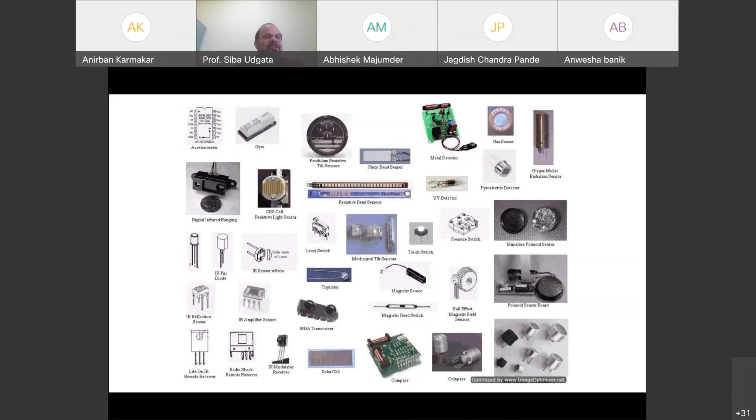A sensor might require some nanovolts to operate, and a sensor might require some kilovolts to operate. A sensor might require an electronic circuit to operate, or a sensor may require some kind of biological signal - a chemical sensor, meaning where you require chemical components to measure the sensitivity of the sensor. So this slide says there are different types of sensors, different sizes, different principles of sensing, different cost factors, and different reliability associated with sensing.

Now let me talk about what is a smart sensor, what is an intelligent sensor, and what is a normal sensor. Let us look at this diagram. I picked it from somewhere on Facebook, and I take this quote and use it to define what is a smart sensor network and what is an intelligent sensor network.

The difference between a smart man and a wise man is that the smart man knows what to say, and a wise man knows whether to say it or not. I put it in the same context here: what is the difference between a smart sensor and an intelligent sensor network?

A smart sensor knows what to measure, but an intelligent sensor knows whether the measurement needs to be forwarded to the server or to the cloud for some decision making or not. I repeat: sometimes I know what to say, but whether to say it or not, this is my wisdom.

Similarly, when I talk about smart and intelligent sensors, many people say that a smart sensor knows how to observe the data, how to collect the data, what data is to be collected, and all that. But there are some more algorithms which sit on top of these measuring devices to decide whether this data needs to be sent to the server or the cloud or not.

So in a smart city perspective or in any sensor network perspective, the sensors will collect the data, but there should be a decision taken at the edge. We call that decision at the edge, or intelligence at the edge, to decide whether the decision will be taken at the edge, that is, at the endpoint, or at the server level, or in a distributed environment, or at the cloud level.

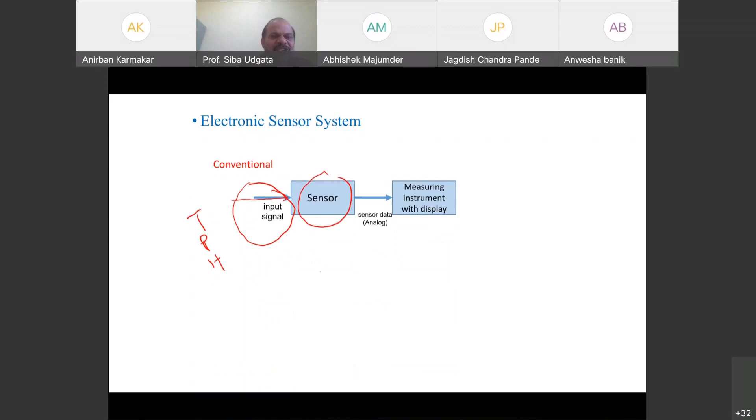So temperature is given, and your temperature sensor or pressure sensor or humidity sensor will measure it and display it. Let's say you have an infrared temperature sensor now, you see it in every mall, every place, etc. When you enter, they aim at your forehead or something and measure the temperature, right? That's a simple conventional sensor. They get the input signal, the sensor measures the data and displays it. That's it. There is nothing else - no decision making, no processing, no controller, no saving, nothing.

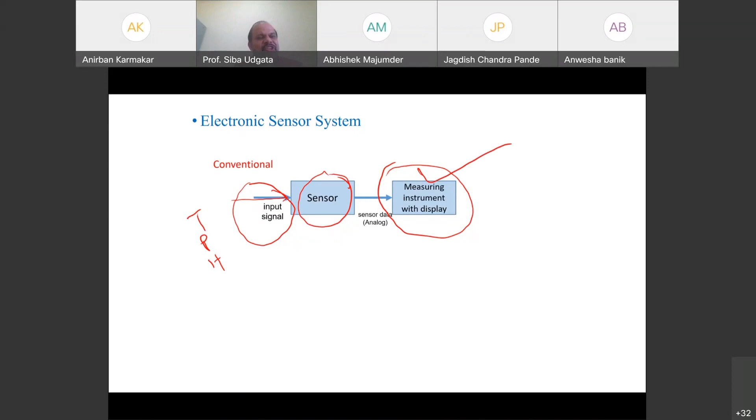What happens in a smart sensor, a little bit enhanced sensor: we get the input signal, same T, P, H, etc. Then the sensor will measure the voltage or current, because I want to classify it. So the sensor will give you a signal. The sensor will not give you a number, I repeat. The sensor will always give you a signal, and that signal can be a voltage, a current, or a light, etc. Now, based on the voltage output, current output, or light output, you have to convert that to a number or a digit. So the sensor gives me a voltage or current.

Then we have an ADC. What is ADC? ADC stands for analog to digital converter. So if I get a signal like this, it will be converted - this is the peak, and this will be converted to 25 degrees centigrade. So this conversion is done by the ADC, analog to digital. So voltage, current, etc. are analog signals.

ADC means analog to digital converter, that gets the digital data. What is the digital data? That's 25 degrees centigrade or 26 degrees centigrade, or pressure equal to this many pascals, etc. So that is the digital data. Then this data comes to a microcontroller or a microprocessor.

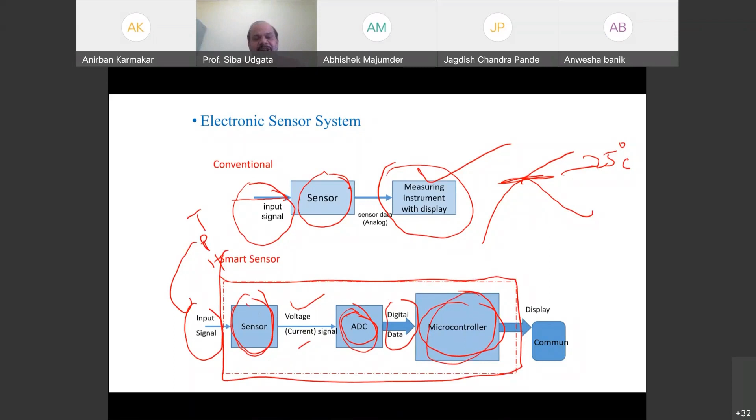So in the node itself, now look at this. This is my node. In the node, I have a sensor, I have an ADC, and I also have a processor, a microcontroller processor. So this microcontroller can do a little bit of processing. Then either it can display the data or it can even communicate to a server, depending on the requirement.

So what is a smart sensor and how is it different from the conventional sensor? In a conventional sensor, we only deal with the sensor. In the smart sensor, we have a processor, an ADC, and a communication module also. This communication module will either communicate using Wi-Fi or Bluetooth, etc., to communicate to a server or to a nearby device, or simply display it.

Now, what happens in an intelligent sensor? This is defined in IEEE 1451, the standard for an intelligent sensor. So what you do here, we have an input signal. We have sensors, and the sensor will give you voltage or current. Then we have an ADC, analog to digital converter, that gives you digital data.

Then we have a microprocessor. Go back to the previous slide - we have a microcontroller or microprocessor here. That microcontroller or microprocessor can be Arduino, can be Raspberry Pi, can be ESP, can be anything, right? And then this is important - this part is intelligent. In that microprocessor, we have some intelligent algorithms, AI-based algorithms or machine learning algorithms, which take the intelligent decision.

Now, the data comes, the voltage or signal comes, the ADC converts it to digital format. The digital data is fed to the microprocessor. The microprocessor, with the help of embedded intelligent algorithms, takes a decision and then displays it or communicates it to a server. So this is basically what an intelligent sensor is. The only difference between an intelligent sensor and a smart sensor is this intelligent algorithm.

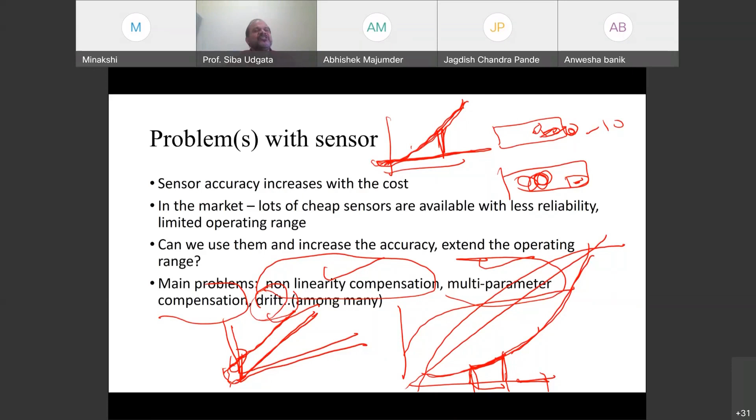So I have already told you what is nonlinearity compensation. Linear means simple curvature - this is linear. But nonlinear is this. So this is nonlinear, and this is linear. If it's a straight line equation, it's linear, but we have already discussed nonlinearity compensation.

Nonlinearity in a sensor is already there. In the characteristics curves, we see that there is a nonlinearity in the compensation, and sometimes the nonlinearity characteristics also vary with the range of values. For example, it can be like this, then it becomes like this, then like this, like this. So this is also an important thing.

The effect of nonlinearity is that you are trying to measure the values of the parameters using the sensor in a wrong way, and that measurement error will affect the decision making there. So what happens actually is these characteristics are time varying, because they vary with the range, and they are also influenced by other environmental parameters.

For example, my heartbeat - my heartbeat normally increases a bit if I'm running a fever. So if you run a fever, because of the fever your heartbeat increases, not because of a heart defect. So those effects will also be there, and that makes the system quite unpredictable. The value that comes actually becomes unpredictable because it depends on so many other factors also.

So this is the problem of nonlinearity, and any intelligent sensor in a large scale application has to address it theoretically so that you get a better result. Better input means better output, better decision making - you know that principle, right? GIGO: garbage in, garbage out. So if your input is garbage, if your input is erroneous, then you will get erroneous decision making.

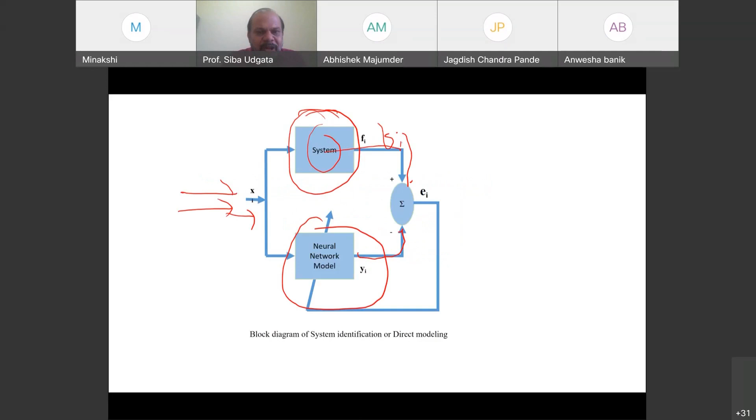So the hardware sensor system will give the output, that is my function, and this function I take it and give the inputs to the neural network also. The neural network will also give me output. The sensor fusion will give me an output, and there will be an error here, and that error I take and change the neural network.

Once the neural network is trained fully, I don't need this sensor. I repeat, this is my sensor output, meaning with error and all these things, and I know what is the actual output. So the sensor output is there, the neural network will be there, and this neural network will compensate the sensor. Once I get this value, I'll take the neural network compensation output.

So what I'm doing is, let's say this is my actual value, and this is my sensor observed value. There is a difference between these two values. Now this difference, that is the error, I want to minimize this difference, I want to mitigate this difference. So with this neural network and this system value, I try to find out what is the error and minimize it. When I minimize the error, when it becomes 0, that means whatever sensor output I get, X, the same sensor output I pass through the neural network and the system, and here I get the output and the error becomes 0. So that is direct modeling.

What is indirect modeling or inverse modeling? The direct modeling is basically what we are doing. We are finding out, given f, x1, x2, etc., I find out what is the function f to predict y. But what is inverse modeling? Can I predict x given y? So y equal to f of x is direct modeling. X equal to f of y is the inverse modeling, right?

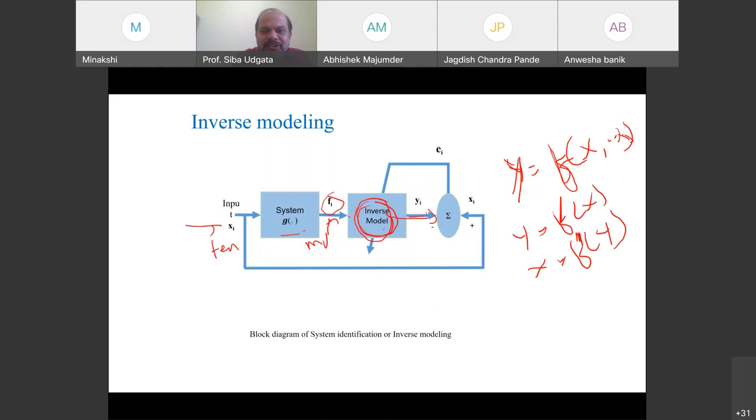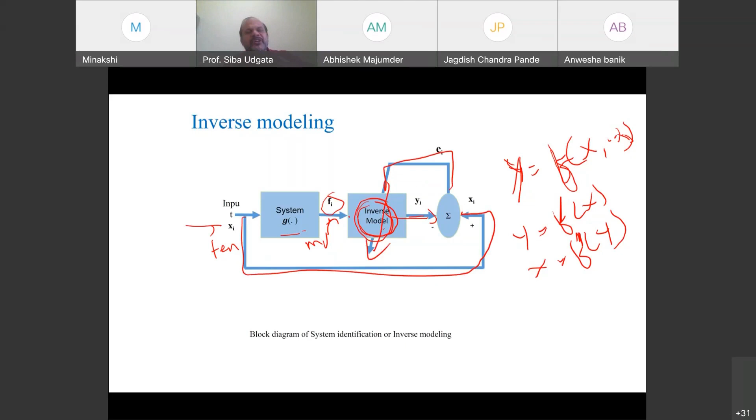Let's say this is my temperature, this is my voltage, my millivolt that I'm getting here. This millivolt, I will give it to the neural network, and I predict what is the temperature. Now I know that the temperature here, this value is the error. Now I take this error and correct the inverse model, so that given the millivolt, I can find out what is the temperature, and given the temperature, you can find out the millivolt. Given the millivolt, you can find out the temperature. So what is direct modeling? You reduce the error, and in the indirect modeling or inverse modeling, from the output you can get back the input also. So these two models are used to cross check the input in a proper way.

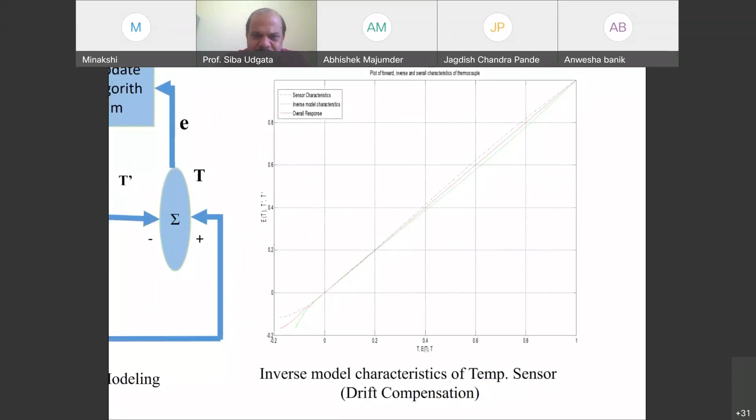Now this is another model. I think the things are a little small, let me try to look at this. I'll draw this actually, so look at my cursor here. This is the inverse model characteristics for temperature sensor drift compensation. So what is drift here? Look at this part, look at this diagram.

So this blue line, when this is 0, it should be 0 here. Now it is not 0, there is a drift here. Now look at this drift. If you look at it, the drift is also nonlinear. It is going like this, then it is changing like this, then becoming like this, etc. Now there is a green line here, so the green line here is this.

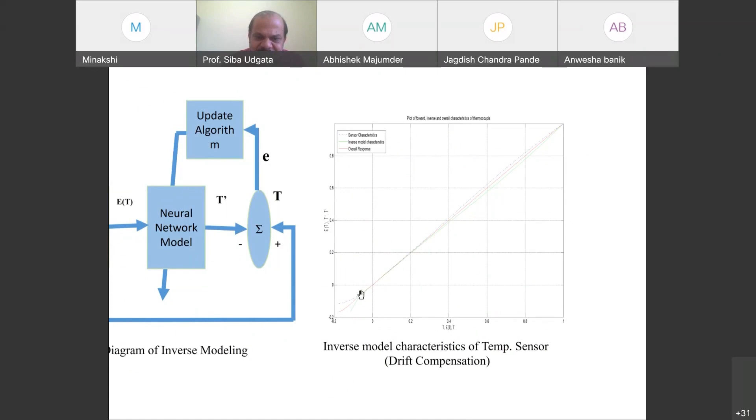Now what I do with the green line is basically like this. Let me plot it like this. So it is like this, my drift is here, it is going like this, and the green line is trying to do like this. So what happens is the drift becomes now this. Once you superimpose this green line, this is my green line, this is my blue line, and I superimpose this, so this becomes a linear drift correction. So then my problem is solved. This is another one where I say that, key. Now look at this, okay.

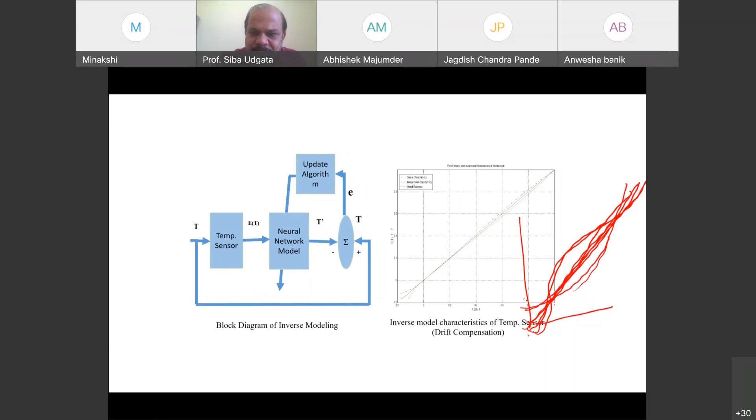Now look at this. The blue is the sensor characteristics - look at the nonlinearity here. This green is the inverse function that we have generated. When you superimpose this green with this blue, you get a linear line. That red is the linear line.

Once it is linearized, my problem is solved. But what the companies do, or the standard conventional sensors do, is look at this blue line and find that there is a linear characteristic between 0.3 to 0.6. So they say my sensor will work between 0.3 to 0.6, other things you manage, I don't want to do that. So by this model, we can extend the operating range of the sensors.

Now, in any smart city environment, monitoring of the water level in overhead tanks of societies, individual homes, etc. is very important, because there is a lot of water wastage due to overflow. Now what is the normal method people are trying to do, or what is available in the market?

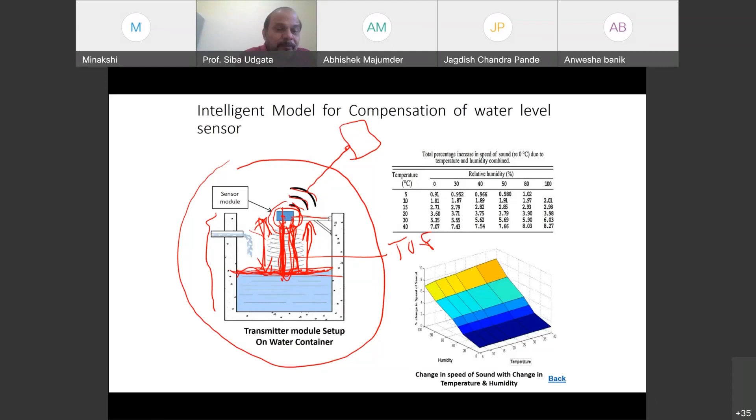But the problem is that the speed of ultrasonic sound heavily depends on the temperature and humidity of the medium. It also depends on gases like carbon dioxide and nitrogen, but it heavily depends on temperature and humidity. If the temperature changes, the speed of sound changes. If the humidity changes, the speed of sound changes.

Here's a small example: the speed of sound normally used in calculations is 340 meters per second. But when the temperature is very low, say 5 degrees centigrade with relative humidity 0, you have to multiply it by 0.91 - that means 9% less. 9% of 340 is about 30 meters per second, so it becomes 310 meters per second. So there is an 18% error overall.

There is an 18% error between temperature 0 degree centigrade to 100 degree centigrade and relative humidity 0 to 100 - a difference of 18%. That means the speed of sound changes by 18% maximum depending on temperature and humidity of the medium. Problem number one. That means the speed of sound, which you take as 340, now varies between 290 to almost 400.

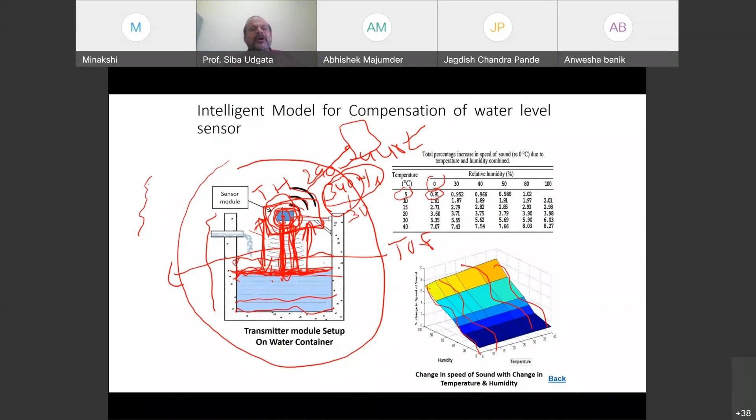Problem number two is that in this part you have the temperature and humidity, meaning you are measuring the temperature and humidity at the top of the water tank. But because it's a water tank, the humidity near the water is more, the temperature near the water is less. Whereas at the measuring point at the top of the overhead tank, the temperature is more and humidity is less. So when the sound wave travels, there is a gradient of temperature and a gradient of humidity which you cannot measure. So we require a kind of machine learning intelligent model to compensate this, not just temperature and humidity. Physics alone cannot do it because there is a gradient of temperature and humidity in the medium, and I need to compensate for that gradient without measuring it. So that's the problem, right?

So we tried to do it, and as I've already explained, you find the time of flight, you find the velocity multiplied by time of flight, divided by 2, that is the distance. This distance represents my water tank, so this much of water is available.

That is fine, but this velocity of sound is erroneous. This depends on temperature and humidity and other factors, but mostly on temperature and humidity. Because it depends on temperature and humidity, this V value changes. If the V value changes, the D value will change. If the D value changes, everything changes, right? So your entire decision making changes.

So this is a simple ultrasonic sensor. This goes, hits an object, comes back, and then we did all these things. That's a simple experiment.

So we did some experiments. This is a University of Hyderabad overhead tank. We put this water sensor, and this itself is not difficult - everybody does that. But what is important is that we put this intelligent compensation into it.

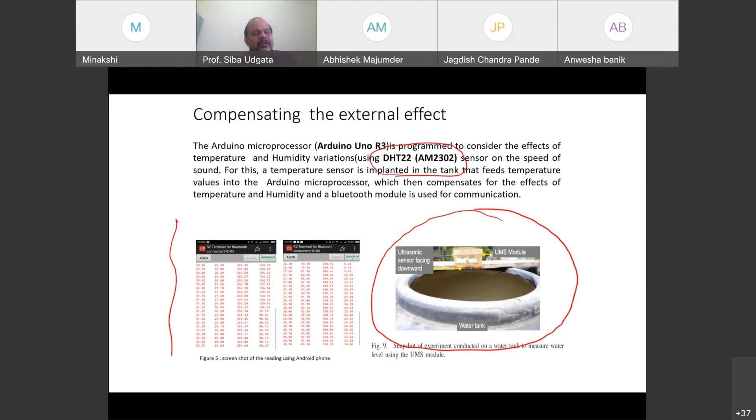We used a DHT22 sensor, which is basically a temperature and humidity measuring sensor. We collected a lot of data during winter, during summer, during high humidity days, during low humidity days, and all that - when the overhead tank is full, when the overhead tank is empty, when it is half full, all sorts of conditions. We did it for almost 6 months.

Then we found that there is a distance measurement uncertainty there, which I already explained is because the temperature and humidity are changing. And we found that the temperature and humidity are indeed changing. For example, in an overhead tank between 100 to 500 centimeter depth, we found that the temperature at the top versus at 500 centimeter depth - this is how it changes.

Humidity is changing based on position. At the top position, the temperature is 24, humidity is 71. In the middle of the tank, the temperature is 23.5 and humidity is 72, increasing. Nearer to the water level, the temperature is 23 and humidity is 73. So there is an increase in humidity when you go below the overhead tank, and a decrease in temperature as you go down.

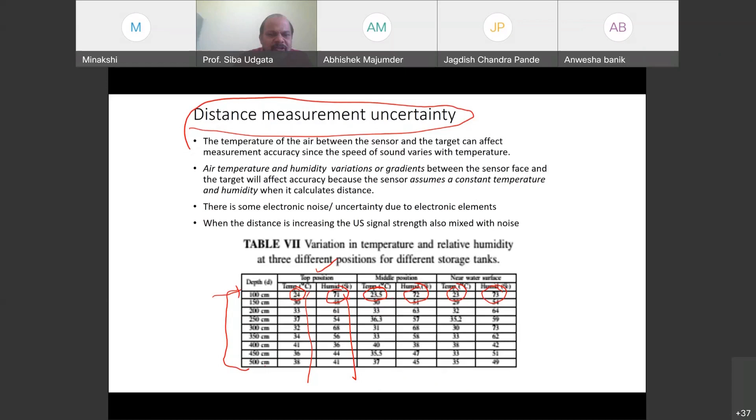This was for a 100 centimeter, that means 1 meter tank. We went up to a 5 meter tank actually, a huge tank, so we found that there is an uncertainty in the measurement.

Now don't worry about that result, look at this result instead. We found that the error was almost 18 to 20%, but between the 2 to 100 input range, that means if the water is only 2 centimeter or 98, 100 centimeter etc., the mean square error is only 0.03. So if the actual water level is 100 centimeter, at best I'm getting 100.03, which is almost negligible. Earlier we used to get 110, 120, 115, etc.

Between 101 to 200, when it increases there is slightly more error, but still only 0.08. And maximum, up to 5 meters, I get an error of 0.23. That means if the tank is measuring up to 450 centimeter of water, I am getting maybe 450.23 water there.

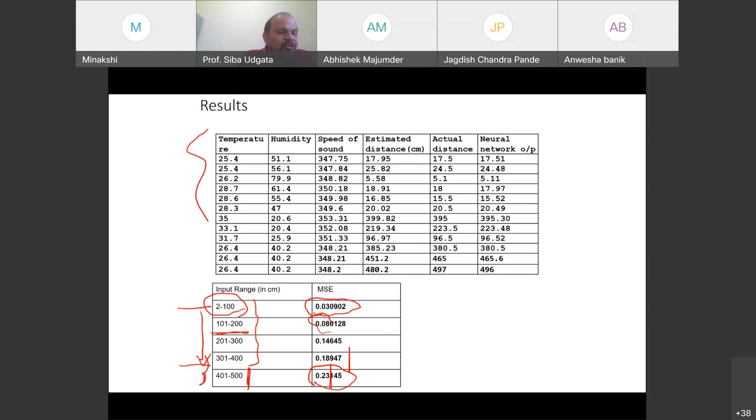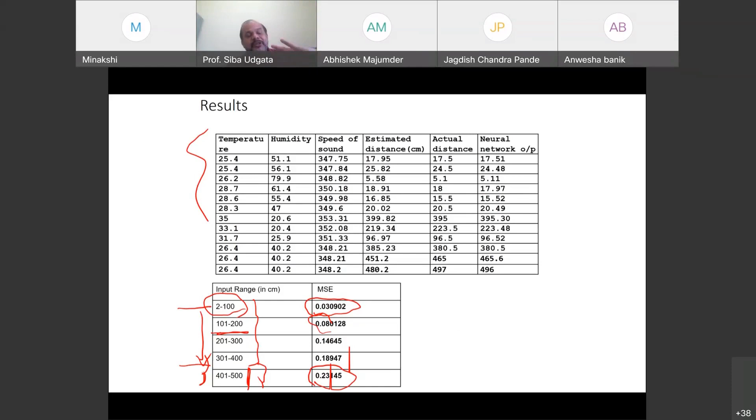Another important thing: the operating range of the ultrasonic sensor used specifies you can measure only between 2 to 400 centimeter, and not beyond that. But with this nonlinear compensation, we could go up to 401 to 500 centimeter. That means we extended the operating range by 25%. But if you go for a new sensor which can measure up to 500 centimeter, it is almost 10 times costlier. So that's the idea of this particular work.

There are a lot of theory and algorithms involved, and I don't want to discuss all those small details here.

This is a paper we published, a novel ANN based adaptive ultrasonic measurement system for accurate water level monitoring, published in IEEE Transactions on Instrumentation and Measurement. The idea is that in a city, on a large scale, we implemented it at University of Hyderabad. But in city-like applications where you monitor hundreds or thousands of overhead tanks or water levels, you require very accurate water level monitoring because every drop is precious.

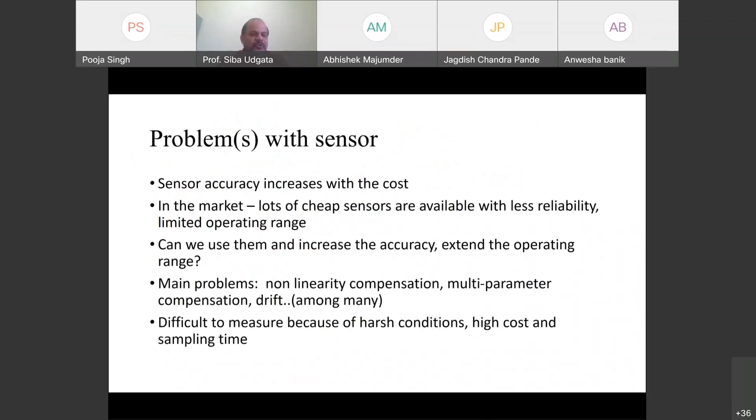Now, what is a soft sensor? The term soft sensor combines the word software, because the models are developed in computer programs, and sensor, because the models provide similar information as a hardware sensor. So a soft sensor is also known as a virtual sensor.

What is a soft sensor? It's used to predict important quantities or variables that are difficult to measure. We have many variables, some are easy to measure and some are difficult to measure. The difficulty may be because of cost, or because of inaccessibility—you cannot go to that location and measure it every time. So these are difficult to measure variables, and we have easy to measure variables as well.

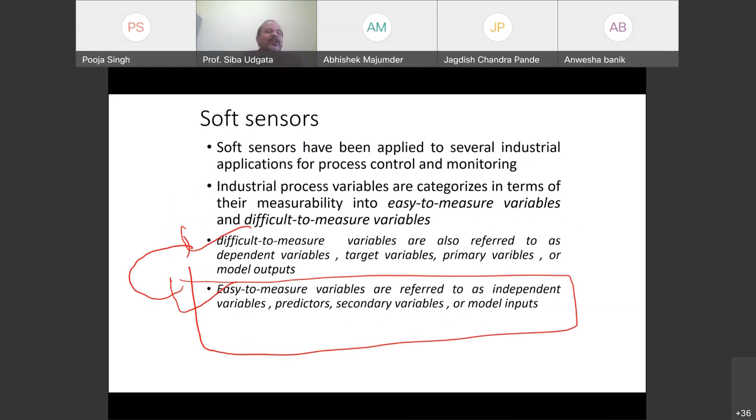Now the question is, can I use these easy to measure variables or locations to predict what is going to happen with the difficult to measure variables? If we can do that, then the soft sensor can replace the hard sensor to a larger extent. But it's not possible for everything—for some parameters it is possible, for others not. Wherever it's not possible, you can always go with a hardware sensor. But is it possible?

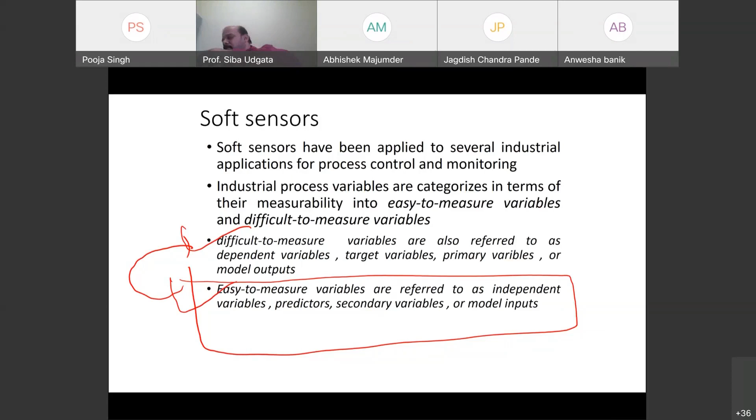We also use the same approach, like we discussed, right? In water level monitoring, we try to use soft sensors for water quality monitoring. In water quality, the normal parameters include biological oxygen demand, chemical oxygen demand, chlorine, total phosphorus, iron, temperature, and so on. Now we're exploring whether there's a possibility of developing a soft sensor instead of a hardware sensor. We found one parameter called COD.

COD means chemical oxygen demand. COD is a parameter mandated by the environmental department—every sewage treatment plant should have it, because they don't want to pollute the environment. But that sensor costs around 2 to 3 lakh rupees. There are also chemistry lab based measurements, but that takes a lot of time. So the problem with COD is that the sensor costs 2-3 lakh rupees, there are import restrictions, it's also not very reliable, and doing it in a laboratory takes a lot of time.

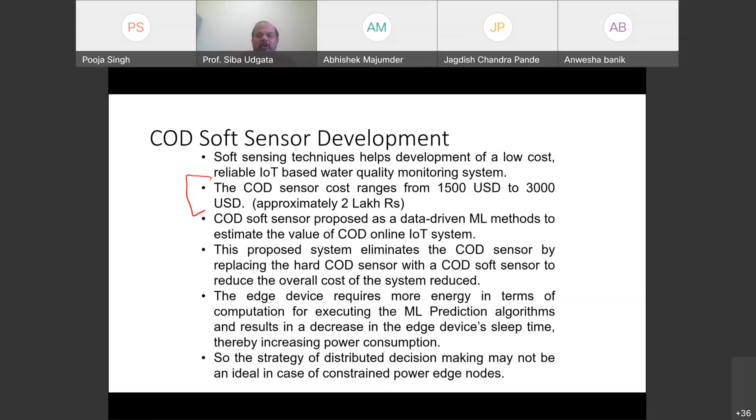We develop the machine learning model. Once the model is ready, I take some parameters and do the live prediction of COD. So again, I get the water, measure the COD in the laboratory, collect other parameters using the sensor, then through the data acquisition, I take it to the cloud.

Using a machine learning model, I designed a function for the COD, chemical oxygen demand. Then I collected the other parameters except COD and started doing live prediction of the COD. So that's what we did here.

During the Kumbh Mela, the UP government put some dashboards and sensors at different locations, and the data was continuously uploaded into a dashboard. You can see on the website what the water quality of the Ganga river is. So we downloaded that data also and tried to model it.

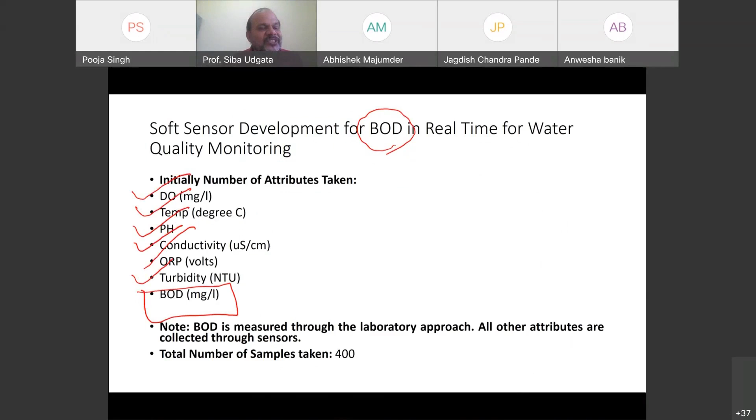We found some relationship doing principal component analysis and multiple correlation analysis, and found that there existed a relationship between these variables and BOD. That prompted us to develop a soft sensor.

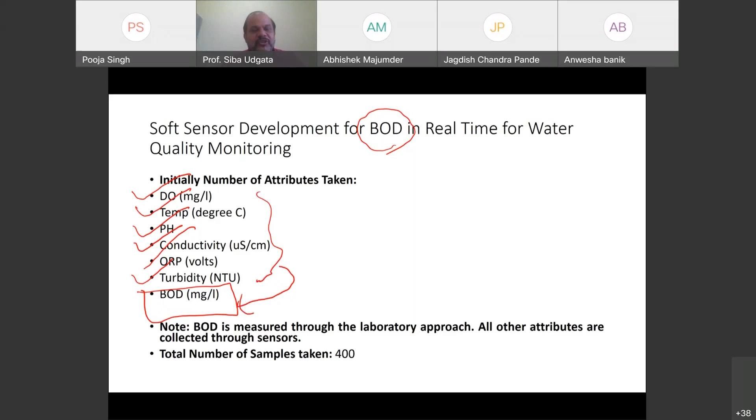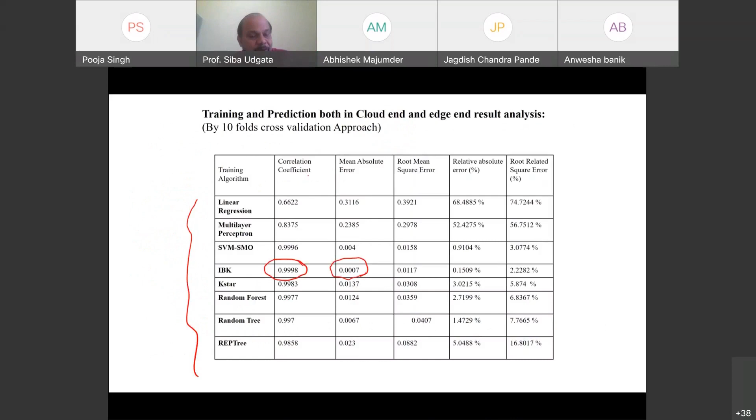So we did the same thing, applying various machine learning techniques. We found that this IBK method gives a correlation coefficient of 0.9998. We took the actual observation and the soft sensor output, and they are almost the same. The mean absolute error is 0.0007 — that's the error between the actual value and the estimated value.

So this is the error. We did the same thing with our own experiment, and we also did it with the Ganga data - real-time Ganga data that the UP government put up during the Kumbh Mela. We collected data from their side too: what is the BOD, what is the DO, what is the pH, and all these things. We took whatever was required and predicted the BOD.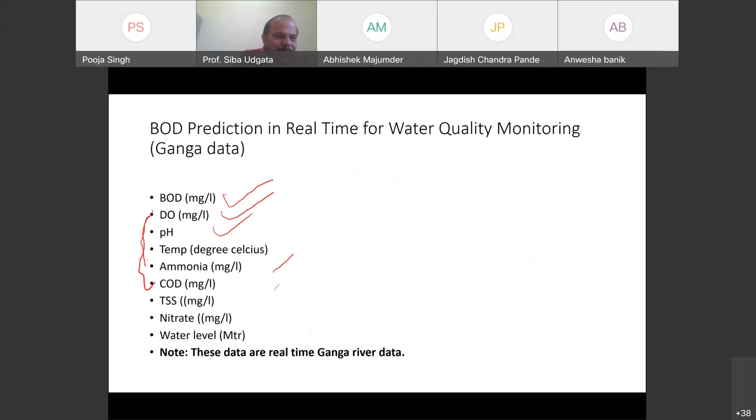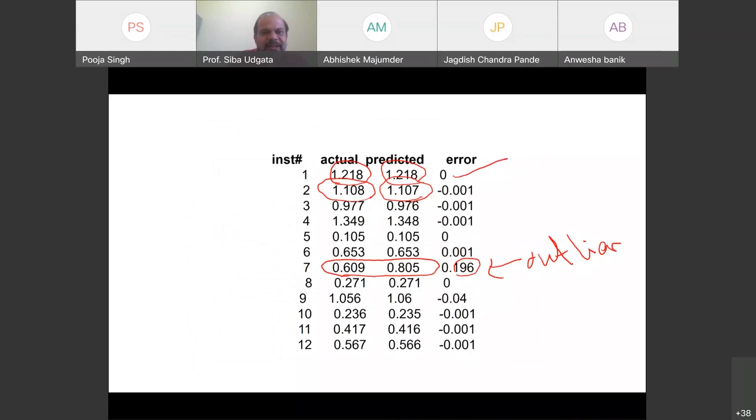This was also published in the Springer Journal of Complex and Intelligent Systems - a machine learning based soft sensor model for BOD estimation using intelligence at edge.

Some of our students here - Nagarjuna and Narsima - were going and deploying the sensor nodes in different places and all that.

I must acknowledge two sponsored projects we worked on. One is development of a wireless sensor network based water quality monitoring system, which we call Aquasense, in a city environment. That was sponsored by DST and followed by the Ministry of Electronics and Information Technology.